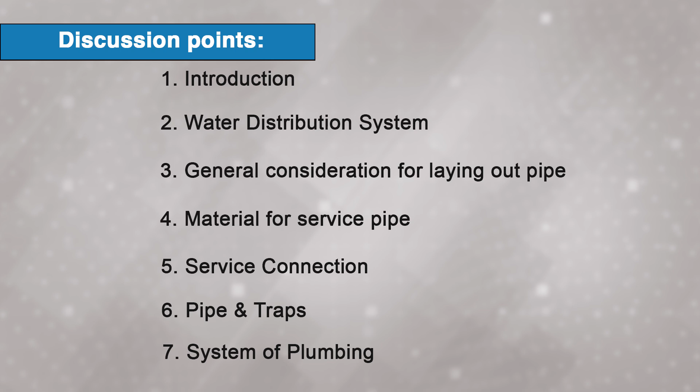Now, let us discuss what is plumbing. Basically, plumbing is an essential service in any building, encompassing the entire system of water supply, distribution and drainage. A well designed plumbing system ensures that an adequate quantity of water is available at all required locations within a building, meeting the various needs of its occupants.

The process begins with the collection of water from the source, followed by its conveyance to treatment plants, treatment and disinfection, and finally its distribution throughout the building. Once inside the building, water is transmitted through a network of pipes which may run either underground or above ground, ensuring that all areas have access to the necessary water supply.

As water is used, it becomes wastewater which must be effectively drained away. This involves a range of sanitary fittings such as taps, valves, wash basins and water closets, all of which play a crucial role in both the water supply and drainage systems. The term plumbing broadly refers to the materials, fixtures and practices involved in the installation, maintenance and operation of these systems. It covers everything from water supply pipes and storage tanks to drainage systems, including septic tanks and vent pipes. Together, these elements ensure the proper functioning of water supply and sanitation services within a building, contributing to the health, safety and comfort of its occupants.

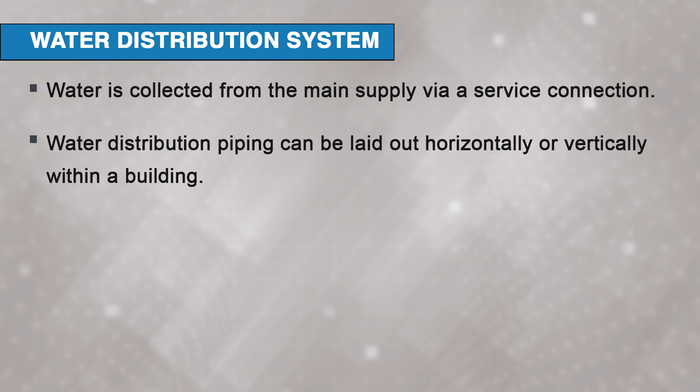Water distribution layout involves horizontal or vertical arrangement. Water distribution piping can be laid out horizontally or vertically within a building. It typically involves underground mains that are under pressure, supplying water directly to fixture inlets.

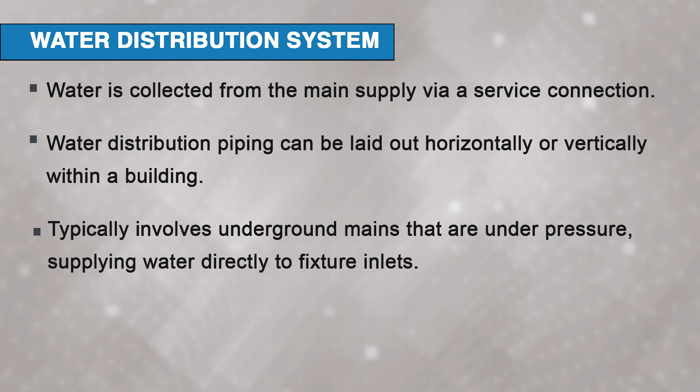Next is the unfeed system. This type of direct supply system, where water is fed under pressure directly to the fixtures, is known as the unfeed system. Alternative water supply methods include the suction tank system and gravity feed.

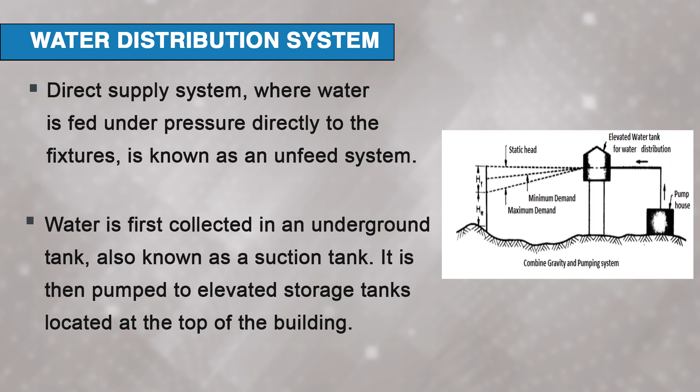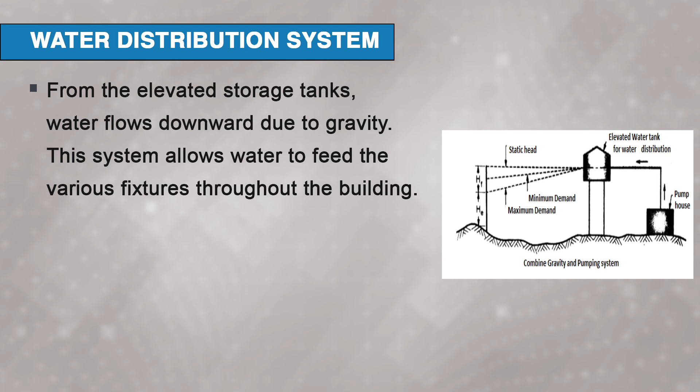So, we will discuss the suction tank system. Water is first collected in an underground tank, also known as a suction tank. It is then pumped to elevated storage tanks located at the top of the building. Next is gravity feed. From the elevated storage tanks, water flows downward due to gravity. This system allows water to feed the various fixtures throughout the building.

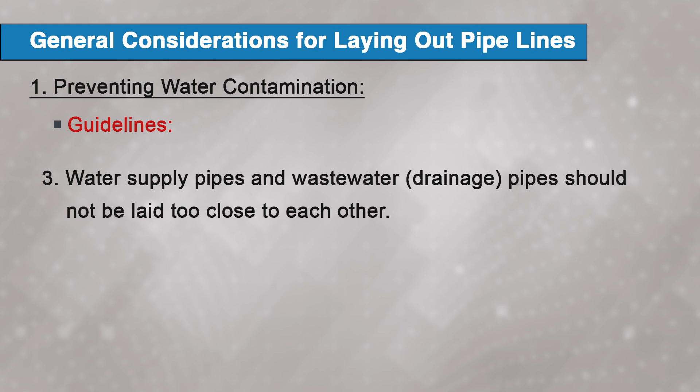Now, there are some general considerations for laying out pipelines. So, when laying out pipelines, the following considerations should be observed, firstly preventing water contamination. We have to ensure the water supply remains uncontaminated by adhering to these guidelines: first, avoid any cross connections between pipes carrying potable water and those carrying used or wastewater. Secondly, prevent backflow from any cistern or appliance into the main water supply. Next, water supply pipes and wastewater pipes should not be laid too close to each other.

Next is protecting the pipeline. Pipelines must be properly protected from damage. Underground pipelines are enclosed in cement mortar to prevent rusting from soil bacteria. We have to provide an earth cover of at least 60 centimeters. For above ground pipelines, we have to ensure the pipeline runs clear of any water exposure. When crossing a wall, the pipeline should be contained within a suitable sleeve for the entire length of crossing.

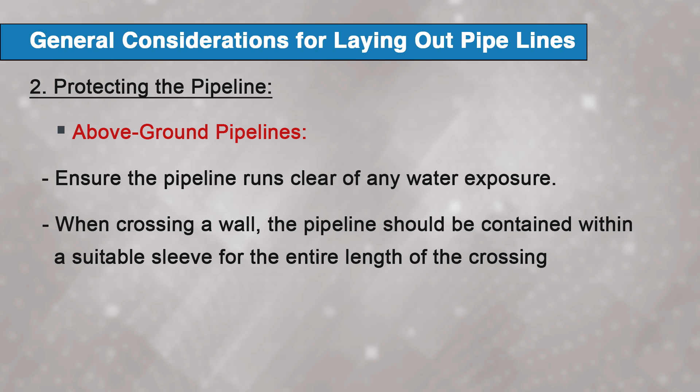Next is maintaining adequate pressure in the unfeed system. So, for the unfeed system, we have to ensure that the pipeline carries water under adequate pressure by following these practices, which include keeping the layout of the pipe as simple and direct as possible, and laying the pipes in as straight a line as possible to avoid unnecessary pressure loss.

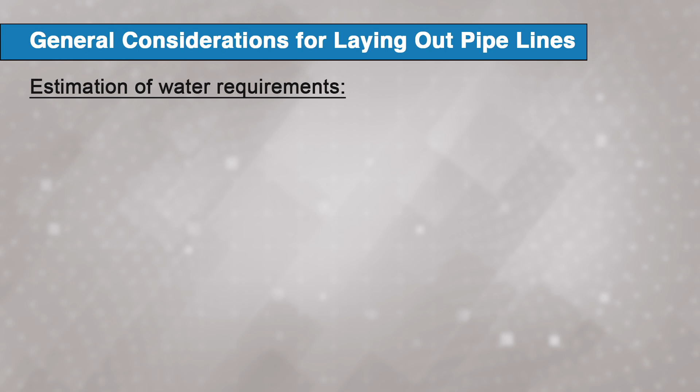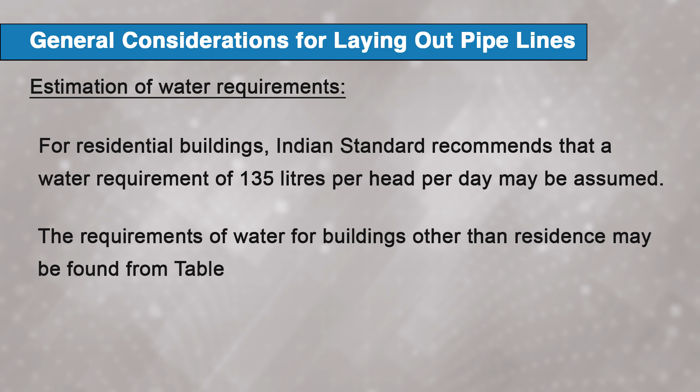Next topic we will be dealing with is the estimation of water requirement. For residential buildings, Indian standard recommends that a water requirement of 135 liters per head per day may be assumed. Out of this, 90 liters may be taken for domestic purposes, while the balance 45 liters are taken for flushing requirements. The requirements of water for buildings other than residences may be found from this table. As you can see in this table, in the first column there is type of building, and in the second column there is the rate per head per day in liters.

For example, factories where bathrooms are required to be provided have a rate of 45 liters per head per day.

Next, consider hospitals, which include laundry per bed. For number of beds not exceeding 100, the rate is 340 liters per head per day.

For schools, if it is a day school, the rate is 45, and if it is a boarding school, the rate will be a little higher at 135.

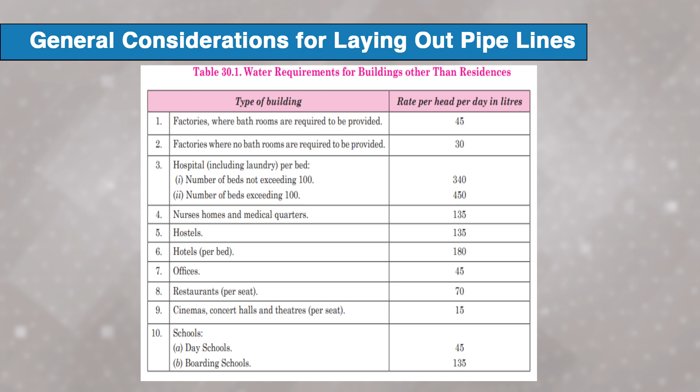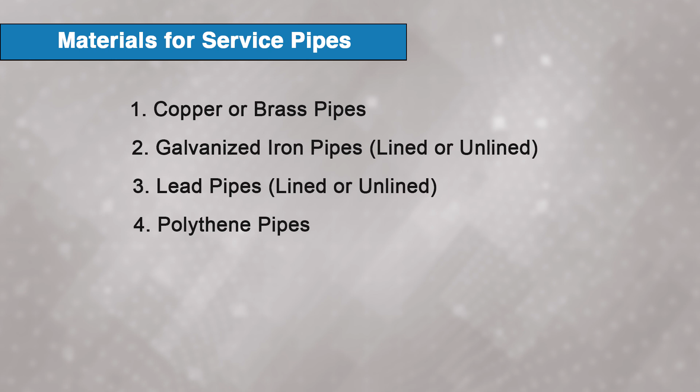Next is material for service pipes. The pipe that connects the distribution main of a municipal water supply to the house plumbing system is referred to as the service pipe. Commonly used materials for service pipes include copper or brass pipes, galvanized iron pipes lined or unlined, lead pipes lined or unlined, and polythene pipes.

First, we will deal with copper tubing. Copper tubing is widely used because it is resistant to corrosion in most water types. It is especially popular in high quality homes and areas where groundwater is highly corrosive to steel pipes. Copper tubing offers considerable strength, good ductility, and is available in long lengths.

There are two main types of copper service pipes: heavy gauge and light gauge. Heavy gauge copper pipes can be threaded and are typically used in high pressure industrial settings. Light gauge tubes, on the other hand, are used for general purposes where the pressure does not exceed 0.15 Newton per mm square and are suitable for internal domestic applications.

For underground installation, such as the pipe running from the main to the building, a special heavy gauged copper tube is used. This type of copper tubing can be directly connected to the main without the need for a conventional gooseneck, using a flared end to attach directly to the corporation cock without threading.

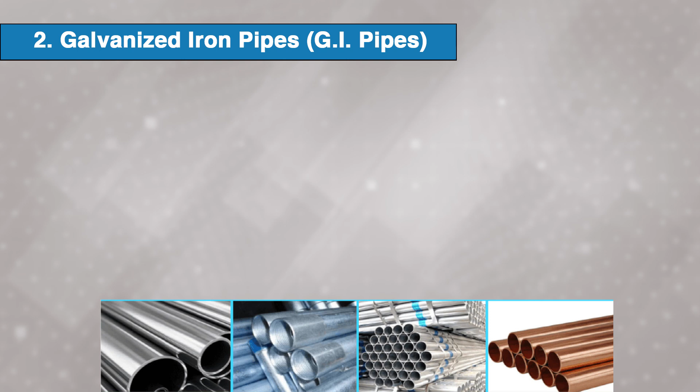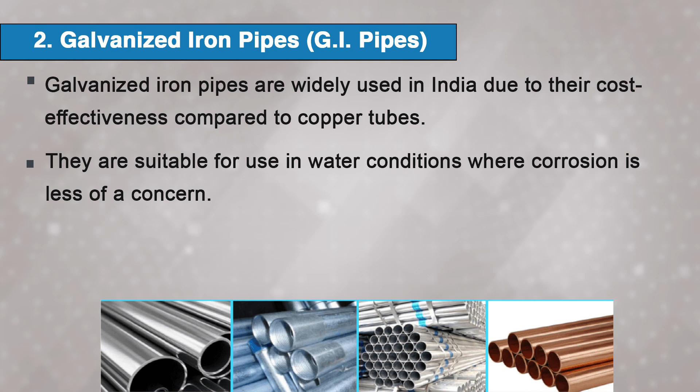Next pipe is galvanized iron pipes, that is GI pipes. GI pipes are widely used in India due to their cost effectiveness compared to copper tubes. They are suitable for use in water conditions where corrosion is less of a concern.

However, galvanized iron or steel tubes are more prone to corrosion in soft and acidic water, while they are stronger and more suitable for hard water areas where they can endure the force required to remove scale. They are not as easily manipulated as copper pipes.

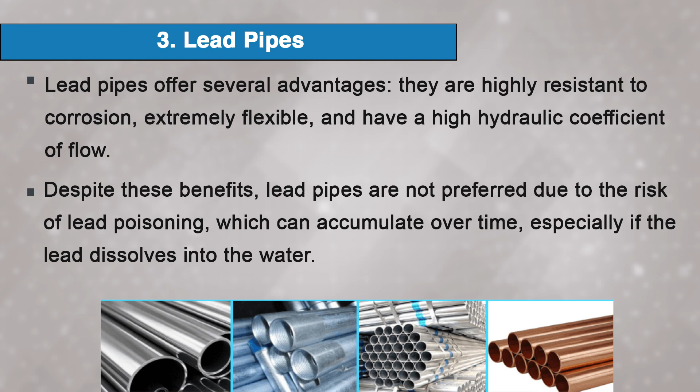Next pipe is lead pipes. Lead pipes offer several advantages, including high resistance to corrosion, extreme flexibility, and a high hydraulic coefficient of flow. Despite these benefits, lead pipes are not preferred due to the risk of lead poisoning, which can accumulate over time, especially if the lead dissolves into the water.

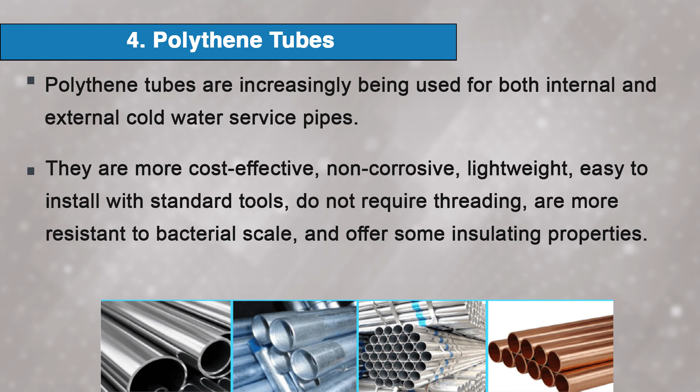Next tubes or pipes are polythene tubes. Polythene tubes are increasingly being used for both internal and external cold water service pipes. Compared to metal piping, plastic pipes have several advantages: they are more cost effective, non-corrosive, lightweight, easy to install with standard tools, do not require threading, are more resistant to bacterial scale, and offer some insulating properties. However, polythene pipes are not suitable for high temperature applications.

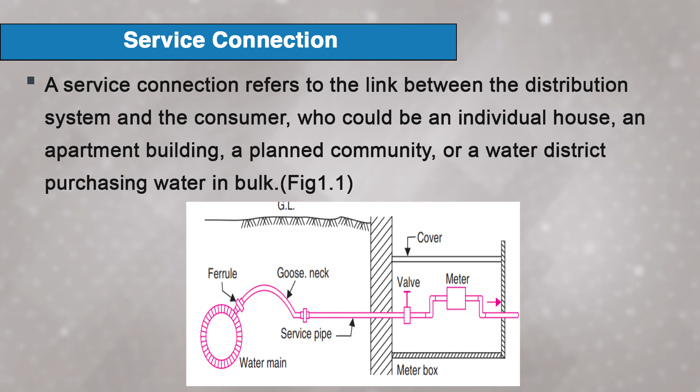Next topic we will be dealing with is service connection. So, what is service connection? It refers to the link between the distribution system and the consumer, who could be an individual house, an apartment building, a planned community, or a water district purchasing water in bulk.

For a single house, this connection typically involves tapping into the main supply while it is still under pressure and installing a corporation cock. A domestic service connection generally includes the following components, firstly the brass or bronze ferrule. A ferrule is a right angled sleeve made of brass or bronze.

For a standard house service connection, the ferrule is inserted into the main supply pipe. This is often done while the main is under pressure, meaning the connection can be made without shutting down the entire water main. Next is the gooseneck.

The gooseneck is a 40 to 50 centimeter long curved piece of flexible pipe made of brass, copper or lead. It provides flexibility at the junction between the water main and the service pipe, preventing the main service pipe from breaking due to any movement between the two.

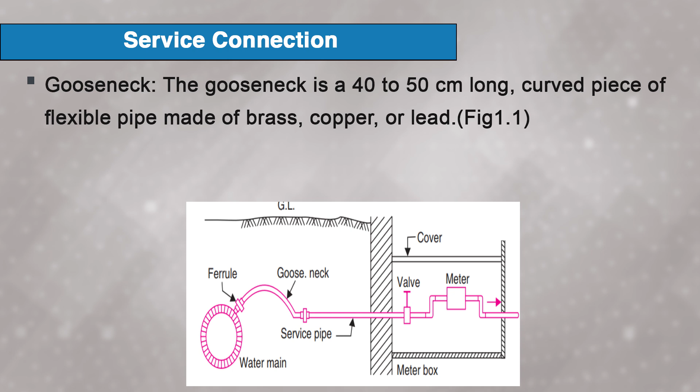Next is the stopcock or curb valve. This is a valve installed in a chamber with a cover, allowing the water supply to be shut off when necessary, such as during plumbing repairs.

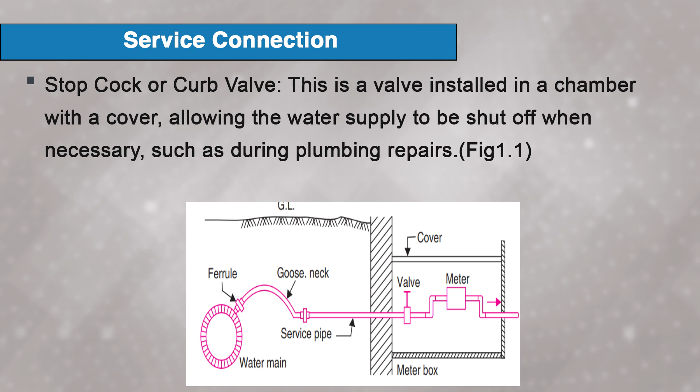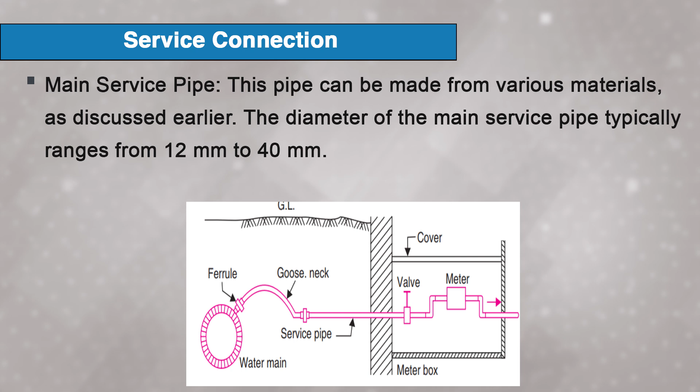Main service pipe: this pipe can be made from various materials as discussed earlier. The diameter of the main service pipe typically ranges from 12 mm to 40 mm.

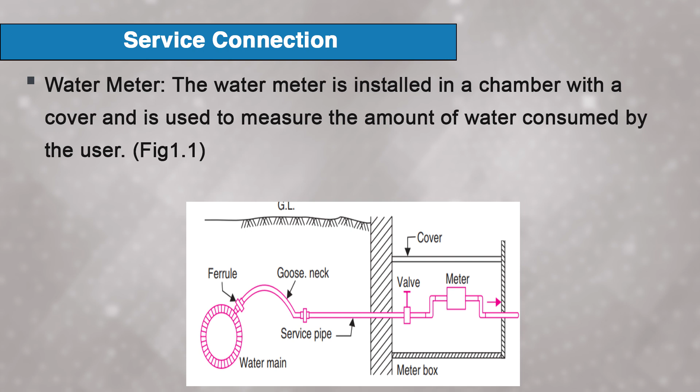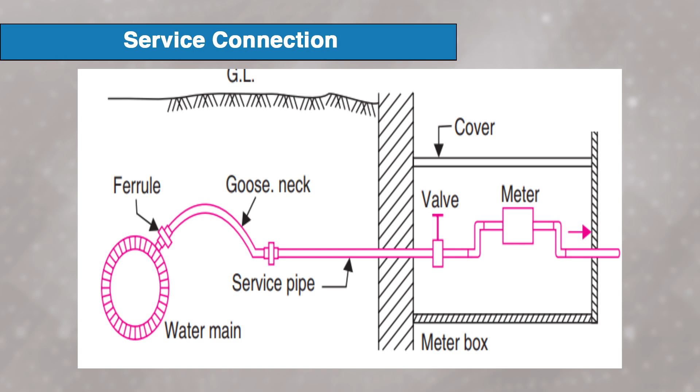Next is the water meter. The water meter is installed in a chamber with a cover and is used to measure the amount of water consumed by the user. A water meter is typically used to measure the flow of water to residential buildings. An effective water meter should have the following characteristics.

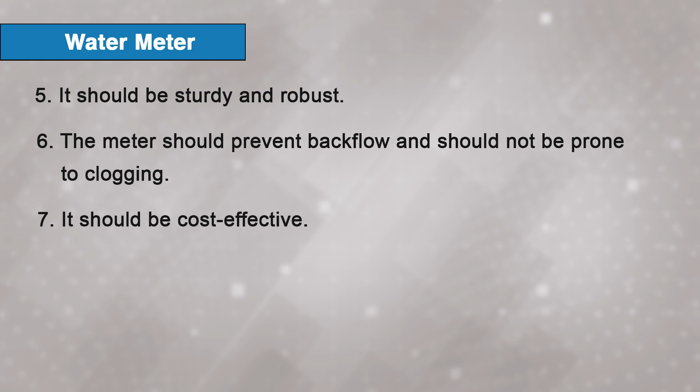Firstly, it must accurately measure and record both small and large water flows. It should be easy to maintain and repair with spare parts readily available. The meter should have good capacity while maintaining a reasonable head loss. It should function efficiently at all pressure levels. The meter should be durable with components resistant to chemicals used in water purification and impurities present in the water. It should be sturdy and robust. The meter should prevent backflow and should not be prone to clogging. It should be cost effective.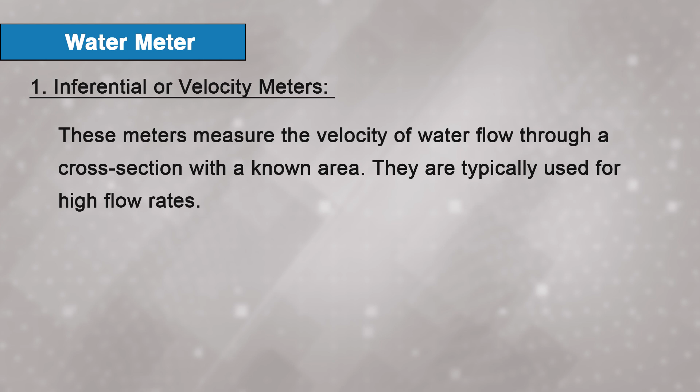Basically, water meters used in distribution systems can be classified into two types: first is inferential or velocity meters, and second is positive or displacement meters. Inferential or velocity meters measure the velocity of flow of water through a cross section with a known area. They are typically used for high flow rates. Common examples include rotary meters and turbine meters.

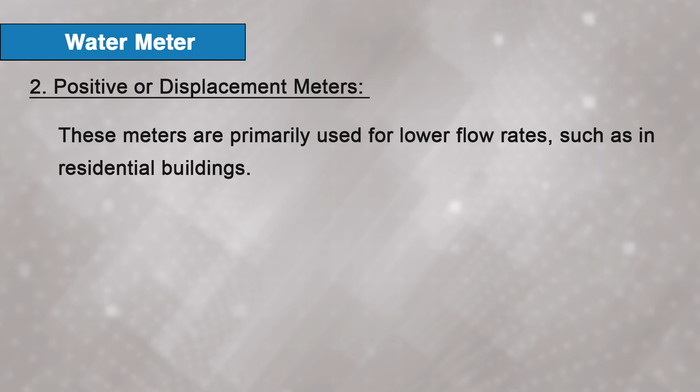Positive or displacement meters are primarily used for lower flow rates, such as in residential buildings. They measure the actual volume of water passing through by filling and emptying a chamber of known capacity. Various types of displacement meters include reciprocating, rotary, oscillating and nutating disc meter, depending on the motion of the internal component.

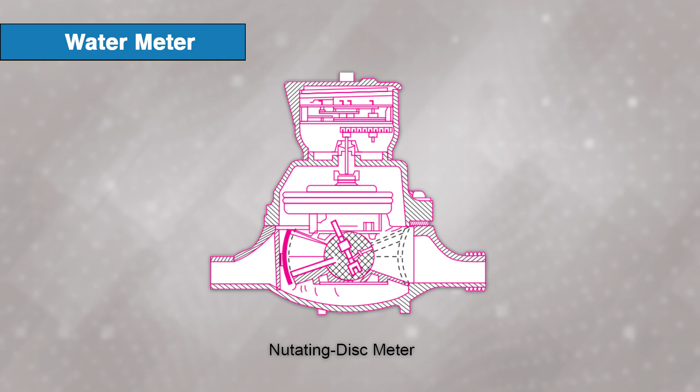One example of the displacement meter is the disc meter. This type of meter contains a disc made of hard rubber placed inside a chamber with inlets and outlets. As water enters the chamber, it causes the disc to oscillate in a spiral motion around its center. The oscillations from one complete cycle of filling and emptying the chamber are recorded by the disc meter as the volume of water passing through.

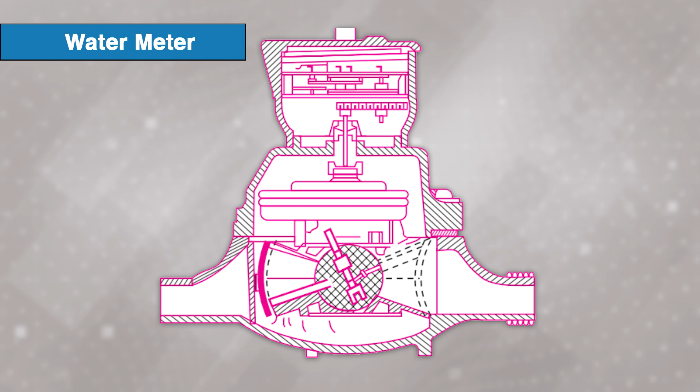Secondly, the gate valve. The gate valve is also used in pipelines to manually control the water flow. It has an advantage over the globe valve in that it offers less resistance to the flow of water. This makes it preferable in situations where minimizing flow resistance is important. Additionally, the gate valve can effectively control the flow of water in either direction.

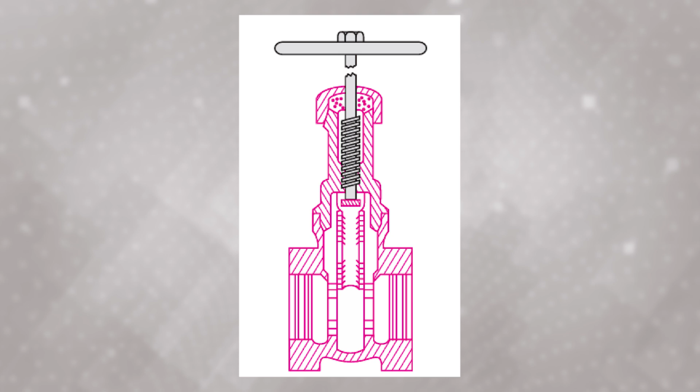Next topic is storage tanks. Water supply to a building can be either continuous or intermittent. Even with a continuous supply, the water pressure might not be sufficient to reach all the floors of the building. In such cases, storage tanks become necessary. These tanks can be located at ground level, roof level, or both.

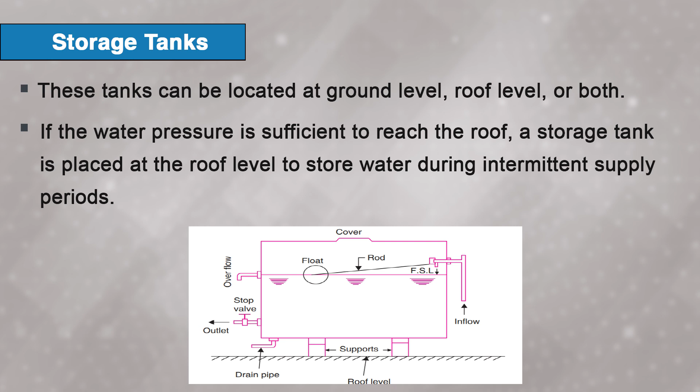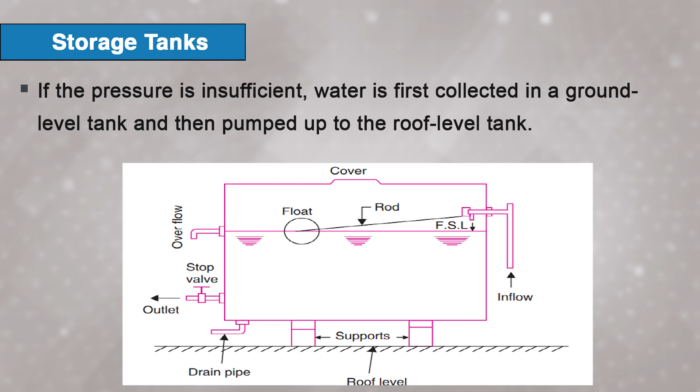If the water pressure is sufficient to reach the roof, a storage tank is placed at the roof level to store water during intermittent supply periods. If the pressure is insufficient, water is first collected in a ground level tank and then pumped up to the roof level tank. Storage tanks can be constructed from the following materials: mild steel pressed plate, reinforced concrete, stone or brick masonry.

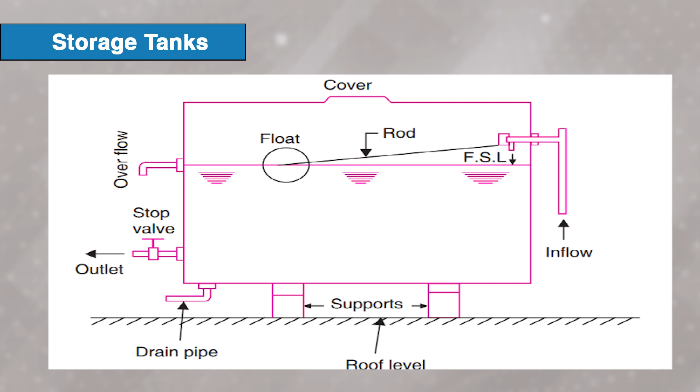This figure illustrates a typical storage tank. A storage tank includes the following components, which include, firstly, the top cover. The cover is made from mild steel, aluminum, or another suitable material. It should be lightweight and fit tightly to prevent mosquitoes from entering. A locking mechanism may also be included.

Next is ball valve with float. This is installed near the tank's inlet to regulate the inflow of water. The float assembly operates automatically to maintain a constant water level. When the water level drops, the float descends, opening the inlet valve. When the water level reaches the full supply level, the float rises, closing the inlet valve.

Next is overflow pipe. It is positioned about 2.5 cm above the full supply level. This pipe allows excess water to escape in case the float assembly fails and the inlet valve remains open. Next is the supply or inlet pipe. This pipe is responsible for bringing water into the tank.

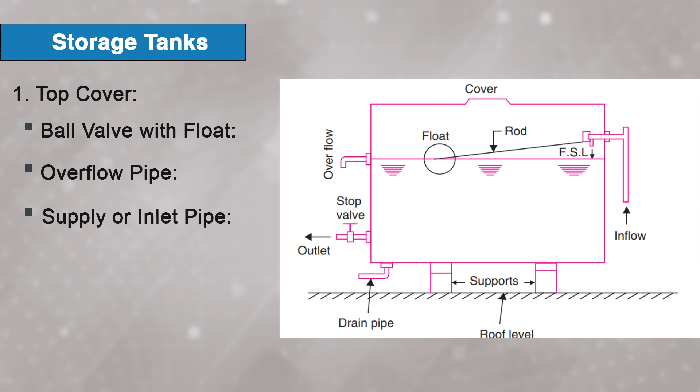Next is outlet pipe with stop valve. It is located about 2.5 to 5 cm above the tank's bottom. This pipe allows the water supply to be shut off when needed. Next is drain or scour pipe. This pipe is used for periodically cleaning the tank.

Next topic is house drainage. There are some general principles which we have to study. Firstly, we will discuss what is house drainage. It refers to the system within a house or building designed to collect and convey wastewater through drain pipes using gravity to connect either to a public sewer system or a domestic septic tank.

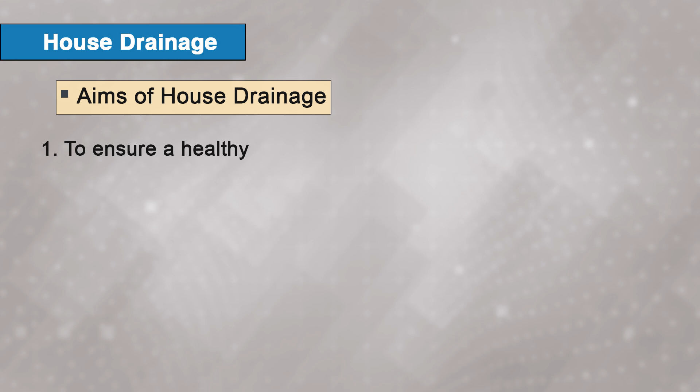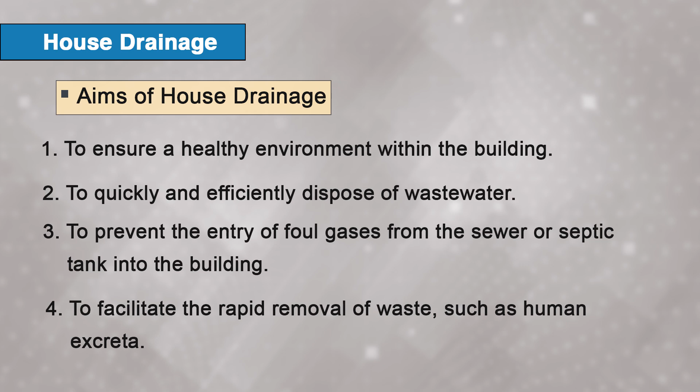So, what are the aims of house drainage? Firstly, to ensure a healthy environment within the building. Secondly, to quickly and efficiently dispose of wastewater, to prevent the entry of foul gases from the sewer or septic tank into the building, to facilitate the rapid removal of waste such as human excreta, and to systematically collect and remove waste materials.

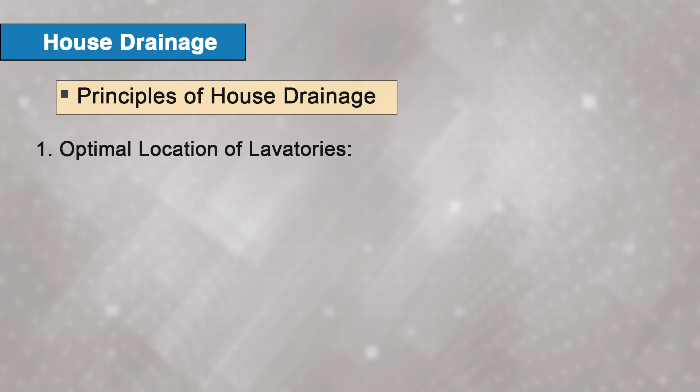Now let us discuss the principles of house drainage. For an effective drainage system, the following principles are observed. First is the optimal location of lavatories: lavatory blocks should be positioned to minimize the length of the drainage line. In multi-story buildings, they should be stacked vertically, and at least one wall of the lavatory block should be an external wall to allow for the installation of soil and vent pipes.

Second is drain pipe placement: drainage pipes should be laid alongside the building rather than underneath it. Next is straight drain alignment: drains should be aligned in a straight line between successive inspection chambers, and sharp bends and junctions should be avoided unless they occur within the chambers.

Next is sufficient drain slope: drains should have an adequate slope to maintain self cleansing velocity. Next is adequate drain size: the drain size should be large enough to prevent flooding during peak discharge. Next is the use of traps: the drainage system should include a sufficient number of traps at appropriate locations.

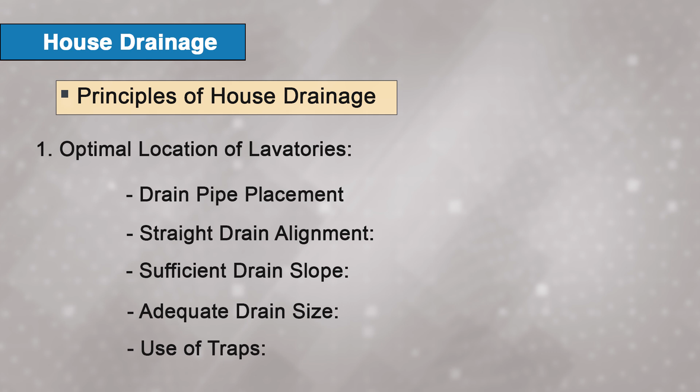Next is disconnection from public sewer: the house drain should be separated from the public sewer by an intercepting trap, preventing the entry of foul gases into the house drainage system. The public sewer should be deeper than the house drain.

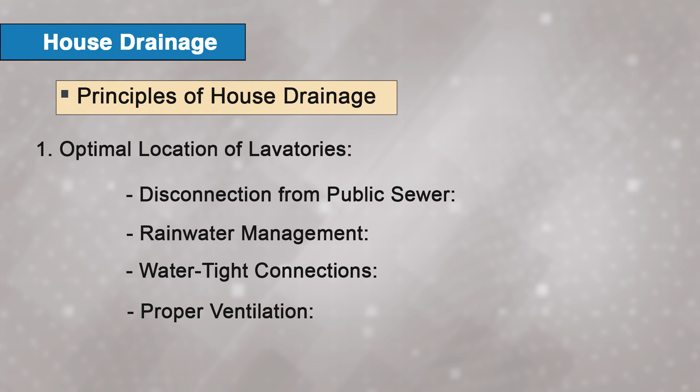Next is rainwater management: rainwater pipes should direct rainwater directly into street gutters, where it can be carried away to the storm water drain. Next is water tight connection: all connections within the drainage system should be water tight. Proper ventilation means the entire drainage system should be well ventilated from the starting point to the final disposal point, allowing for free air circulation. Now we will deal with the topics of pipes and traps.

First, we will discuss pipes. In a house drainage system, pipes are designated based on their specific function. First is the soil pipe, designed to carry human excreta. Next is the waste pipe, which carries only liquid waste excluding human excreta.

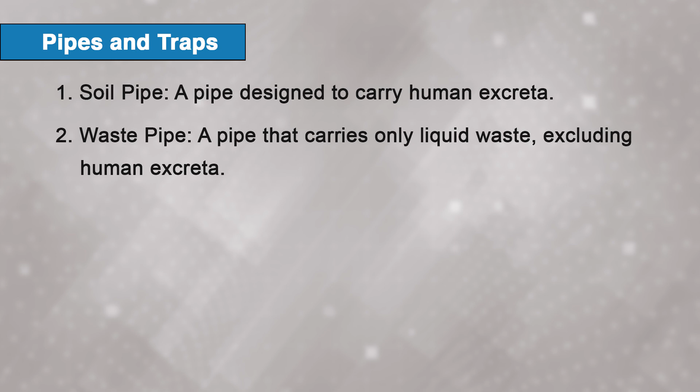Next is the vent pipe, used for ventilating the drainage system. It is open at both the top and bottom, allowing foul gases to escape, and it extends at least 1 meter above the roof level. Next is the rainwater pipe, a pipe specifically used to carry rainwater.

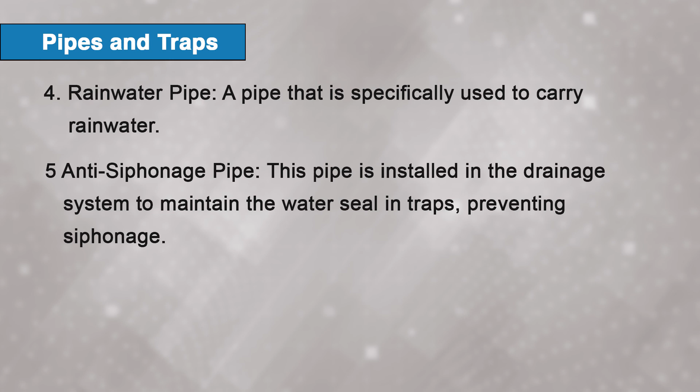Next is the anti-siphonage pipe. This pipe is installed in the drainage system to maintain the water seal in traps, preventing siphonage.

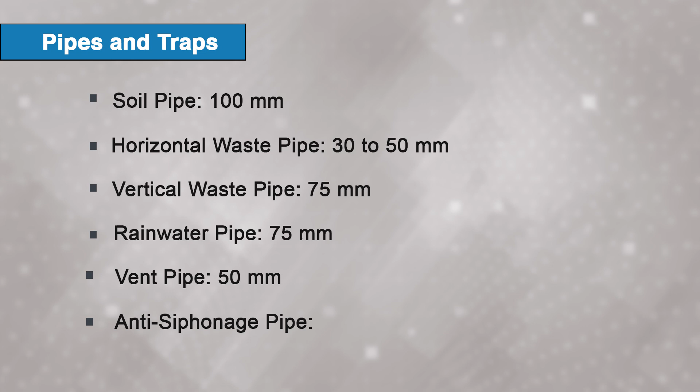The typical pipe sizes used in a house drainage system are: soil pipe around 100 mm, horizontal waste pipe 30 to 50 mm, vertical waste pipe 75 mm, vent pipe 50 mm, and the anti-siphonage pipe connecting to the soil pipe 50 mm and connecting to the waste pipe 40 mm. Next is traps.

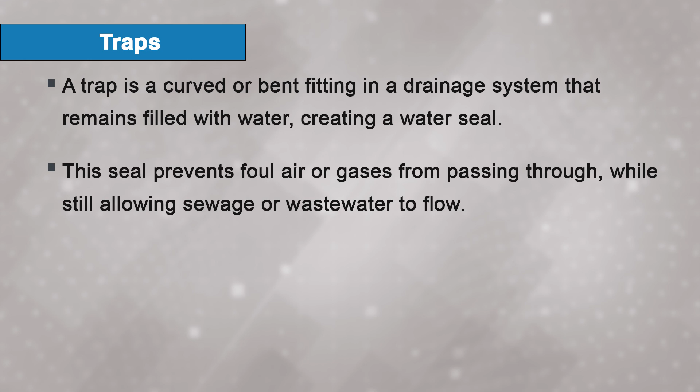A trap is a curved or bent fitting in a drainage system that remains filled with water, creating a water seal. This seal prevents foul air or gases from passing through while still allowing sewage or wastewater to flow. The water seal's depth is the vertical distance between the highest point and the lowest point of the trap. The effectiveness of a trap increases with the depth of its water seal, which typically ranges from 25 mm to 75 mm.

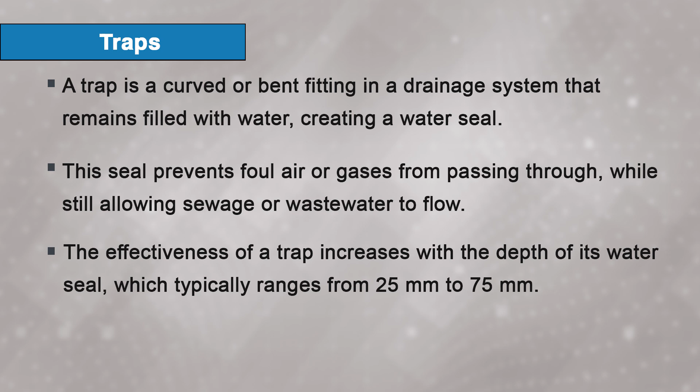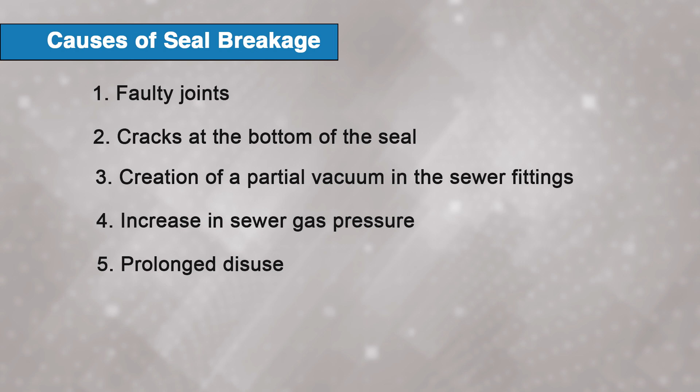Now, what are the causes of seal breakage? The water seal in a trap can be compromised due to faulty joints, cracks at the bottom of the seal, the creation of a partial vacuum in the sewer fittings, an increase in sewer gas pressure, and prolonged disuse. To prevent the water seal from breaking, it is advisable to connect the section between the soil pipe and the trap with a vent pipe, and to use an anti-siphonage pipe within the building.

Now, what are the characteristics of a trap? A good trap should maintain a sufficient water seal at all times while retaining only the minimum necessary water. It should be made from non-absorbent material, and it should be free from internal projections, angles, or constrictions that could impede or slow the flow.

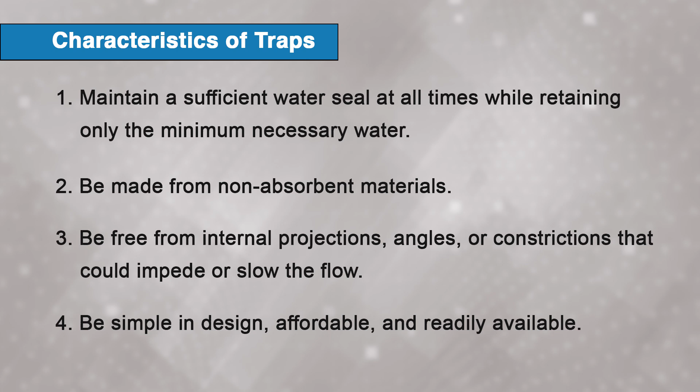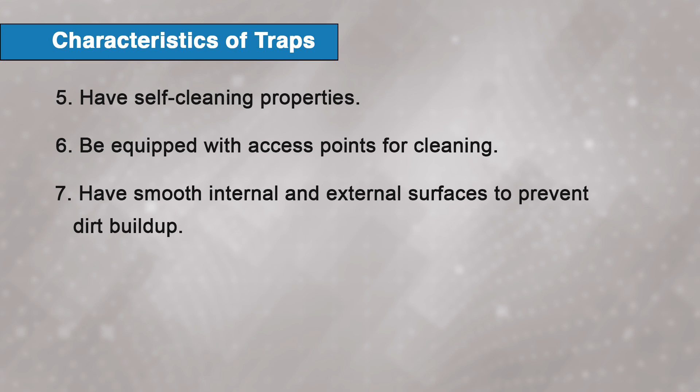It should be simple in design, affordable and readily available. It should have self-cleansing properties, be equipped with an access point for cleaning, and have smooth internal and external surfaces to prevent dirt buildup. Now, there are some classifications of traps according to shape, which are P trap, Q trap, and S trap. So, what are P traps?

They are basically shaped like the letter P with legs positioned at right angles to each other. Next one is the Q trap, which can also be called a half S trap.

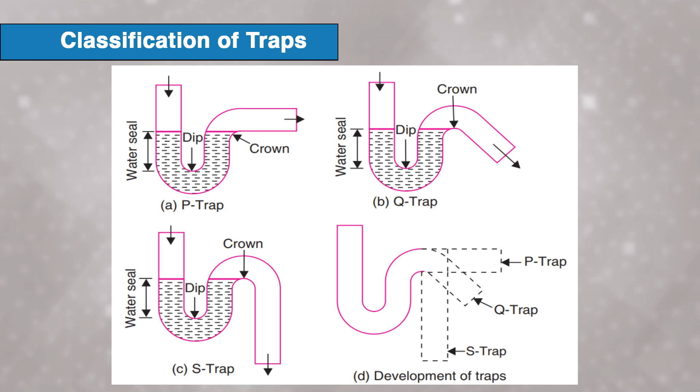It is shaped like letter Q with legs meeting at an angle other than 90 degrees. Next one is the S trap, shaped like letter S with parallel legs discharging in the same direction. Traps can also be classified according to use. First is the floor trap, or nahani trap.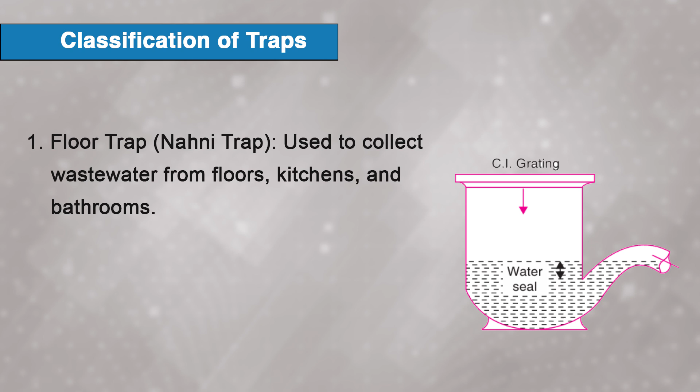It is used to collect wastewater from floors, kitchens and bathrooms, typically made of cast iron with a grate on top to prevent large debris from entering. It has a removable cover for cleaning and a small water seal.

Next one is the gully trap. It disconnects sullage drains from the main drainage system, usually made of stoneware or cast iron. It includes a water seal of 60 to 70 mm and may feature either an S trap or P trap. It is typically installed at the external wall of a building to receive wastewater from baths and kitchens before passing it to the house drain.

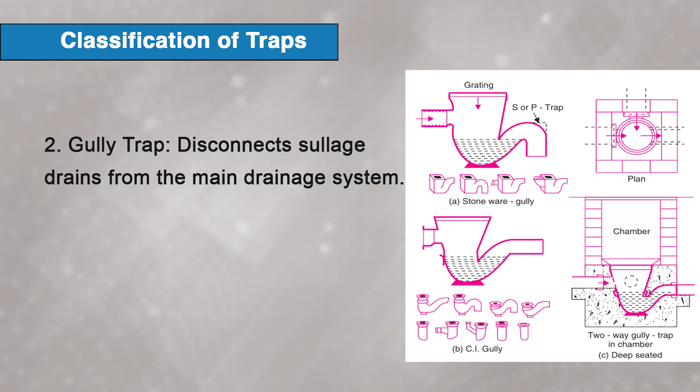Next one is the intercepting trap. It is installed at the junction where the house drain connects to the public sewer or septic tank. It is located in the last manhole of the house drainage system. It has a deep water seal of 100 mm to prevent sewer gases from entering the house, and includes a cleaning eye or rodding arm with a tight fitting plug for easy maintenance.

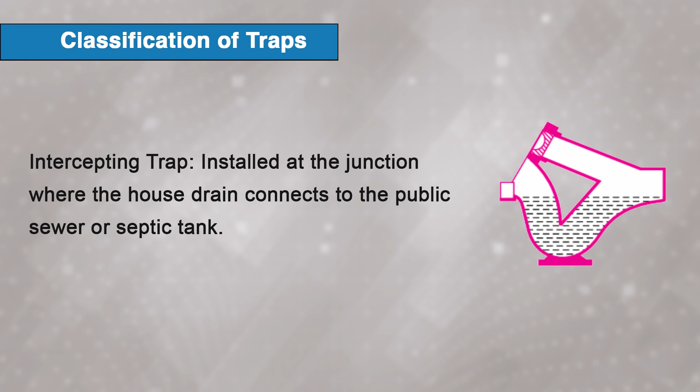Next one is the grease trap. It is used in large hotels, restaurants or industries where significant amounts of oily waste are produced. A grease trap, usually made of masonry or cast iron, reduces the flow velocity, allowing greasy matter to separate and float on top, where it can later be removed.

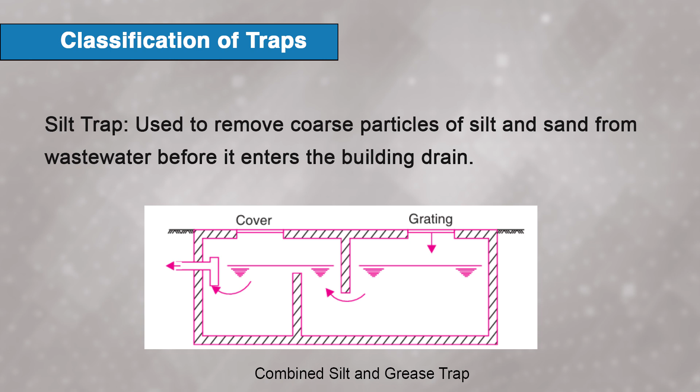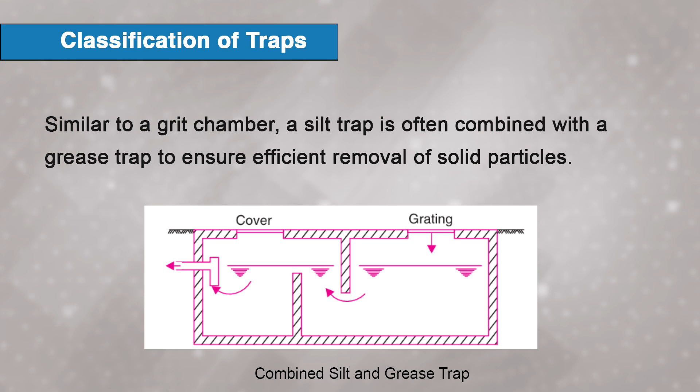Next one is the silt trap. It is used to remove coarse particles of silt and sand from wastewater before it enters the building drain. Similar to a grit chamber, a silt trap is often combined with a grease trap to ensure efficient removal of solid particles. So, our last topic is systems of plumbing.

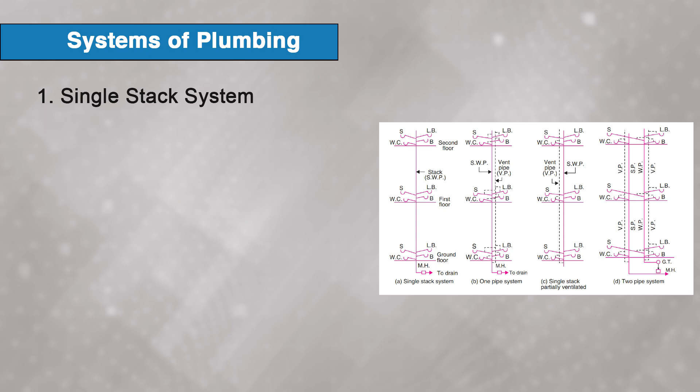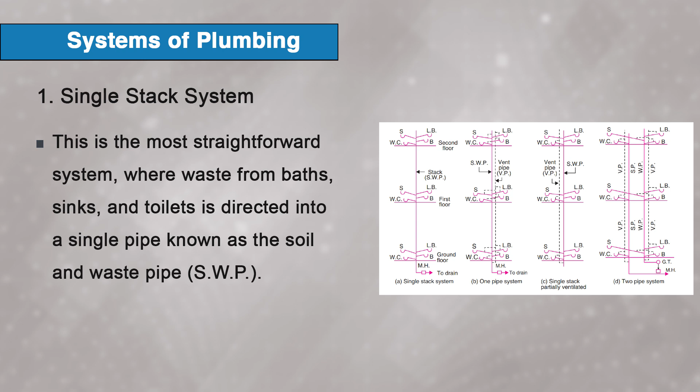Basically, there are 4 primary plumbing systems used for building drainage. First one is the single stack system. This is the most straightforward system where waste from bath, sink and toilet is directed into a single pipe known as the soil and waste pipe.

This pipe also serves as a vent at its top, so no additional vent pipe is required. The system is only effective if the traps maintain a water seal within a depth of at least 75 mm. In this setup, gully traps and separate waste pipes are eliminated. The single stack system is economical and simple because it uses only one pipe.

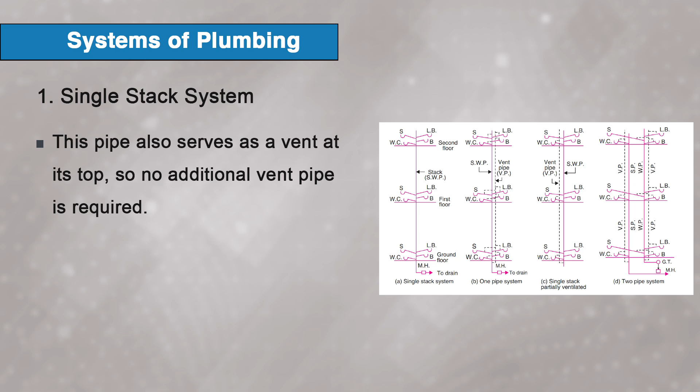Next system is the one pipe system. Here, an additional vent pipe is provided and the traps for all water closets, basins and other fixtures are fully ventilated. In multi-story buildings, the lavatory blocks on different floors are aligned vertically, allowing waste from various floors to be carried through a common soil and waste pipe. This system is more expensive than the single stack system due to the extra vent pipe.

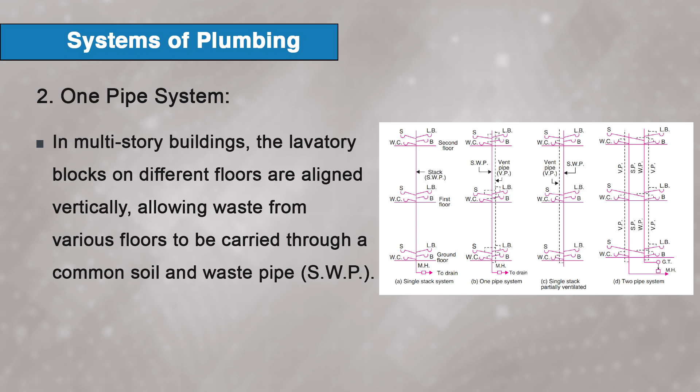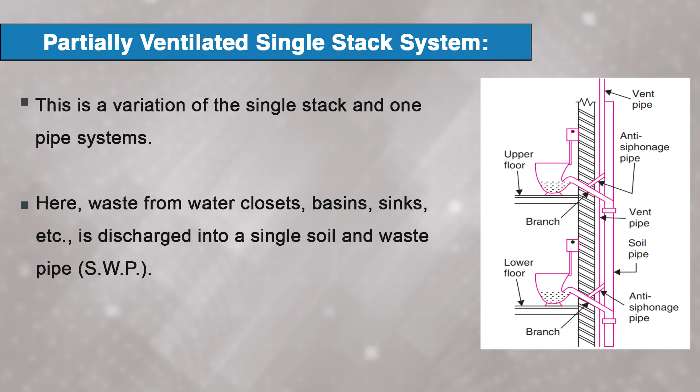Next system is the partially ventilated single stack system. This is a variation of the single stack and one pipe system. Here, waste from water closets, basins, sinks, etc. is discharged into a single soil and waste pipe. Additionally, a relief vent pipe is provided to ventilate the water closet traps, but the traps of basins and other fixtures are not directly connected to the vent pipe.

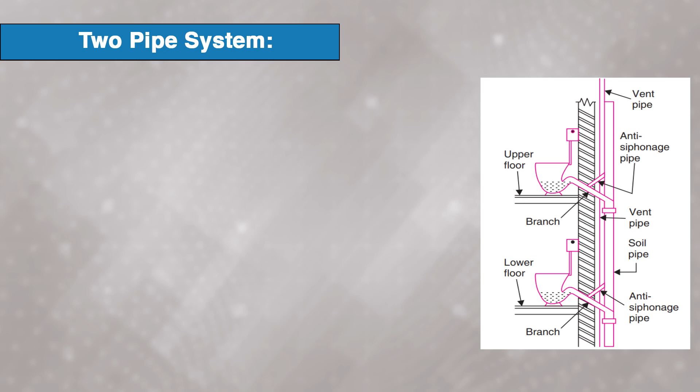Next system is the two pipe system. This system involves separate soil pipes and waste pipes. Waste from toilets is directed to the soil pipe, while discharge from bath, sink and lavatory basins is routed to the waste pipe. All traps are fully ventilated with separate vent pipes. Thus, 4 pipes are required in this system. The waste pipe is disconnected from the drain using a gully trap.

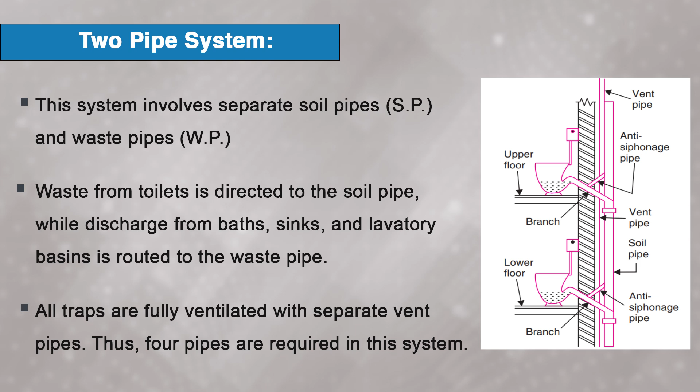Our last topic is the anti-siphonage pipe. An anti-siphonage pipe is installed to preserve the water seal in traps by maintaining proper ventilation and preventing siphonic action from breaking the seal. In multi-story buildings, when water is flushed from an upper floor, it can create a suction effect that draws air from the branch pipe connecting the lower floor's toilet to the soil pipe. This suction creates a partial vacuum on the downstream side of the water seal in the lower toilet, potentially breaking the seal by siphoning the water out.

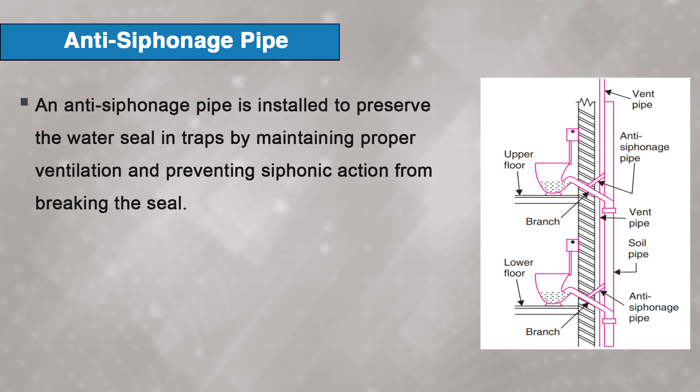To prevent this, the crown of the trap is connected to the atmosphere through an anti-siphonage pipe. A ventilating pipe can also serve as an anti-siphonage pipe, as you can see in this figure.